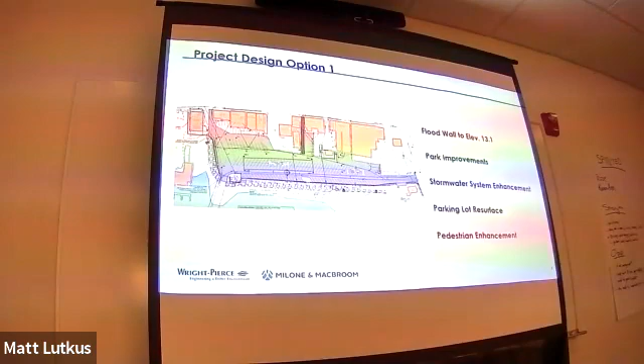We also looked at resurfacing the parking lot and pedestrian enhancements. Another stormwater enhancement we looked at: what happens if you have a rainfall event in the parking lot and you only have so much volume in your stormwater system to store that water.

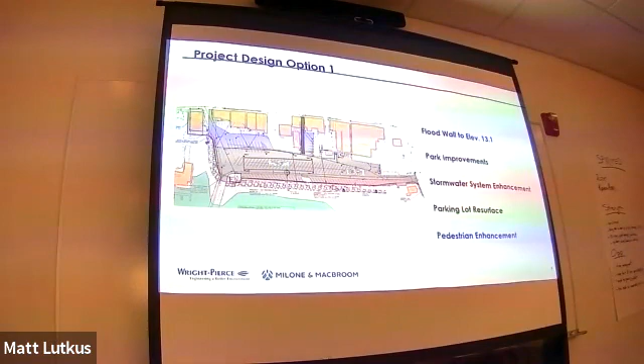So we looked at how to prevent the parking lot from flooding internally during an external flood condition. We looked at a host of different scenarios to come up with the 100-year, or 1% return interval, for that scenario, running probability models to see how big our storage would have to be to avoid flooding any buildings internally during a river flooding event.

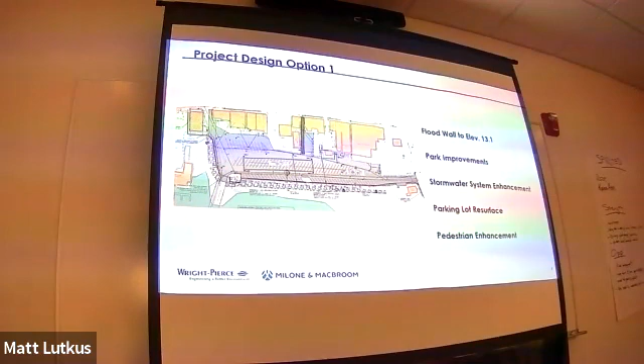Our design option two, focusing on the west side where the major change happens, has all the same components as option one, but the wall height is again 11 feet, not 13.1. On the west side, we looked at some temporary deployable walls or flood barrier systems you could deploy in that area to protect up to 11 feet of height.

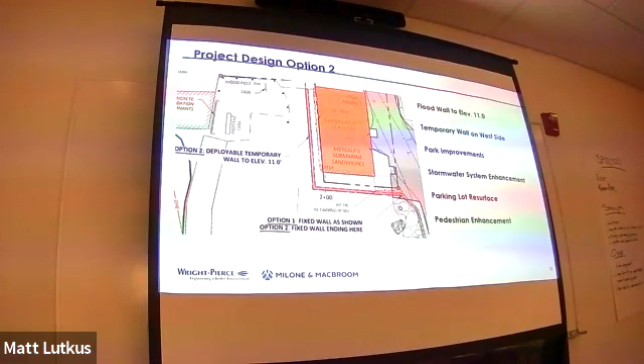We have some options there we'll discuss later as a stopgap measure. The wall itself would be designed so that in the future you could raise it to a higher elevation of 13.1 feet. We also looked at a 100-year sea level rise scenario that took us to over 14 feet high.

We looked at several different wall options. When we started this project, our initial thought was to put up a sheet pile wall we could clad. When we ran those numbers initially, they came in quite a bit higher than our budget.

So we went back and looked at other alternatives for a wall that would be less expensive and within our budget. We worked with Milone and MacBroom's geotechnical engineer, Eric Teal, who I believe is also on the line in case we have questions for him. He's in the Zoom meeting.

We looked at a number of different foundation and wall systems. Eric worked with a contractor who provided information, including cost information, on a rapid impact compaction process, where you compact the surface to densify the fill layer sitting on top of the clays, slowing the permeability so that tidal surges don't significantly impact the structural characteristics of the parking lot and the wall.

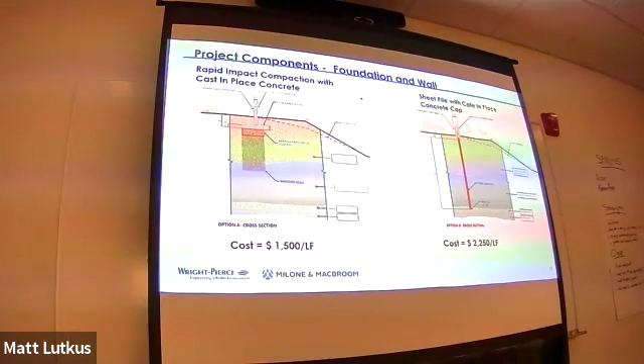The sheet pile wall, as you can imagine, is a natural barrier, and that's one of the concerns from a geotechnical perspective. If we need a wall that meets CLOMR or LOMR standards in the future, you can't have a lot of groundwater movement during high tide events, which currently seems to occur in that fill layer above the clay and below the parking lot.

So what we did is we costed out these options, and it looked like the rapid impact compaction foundation method with a cast-in-place concrete wall on top appeared to be significantly cheaper per linear foot than the sheet pile wall system with a cast concrete wall on top.

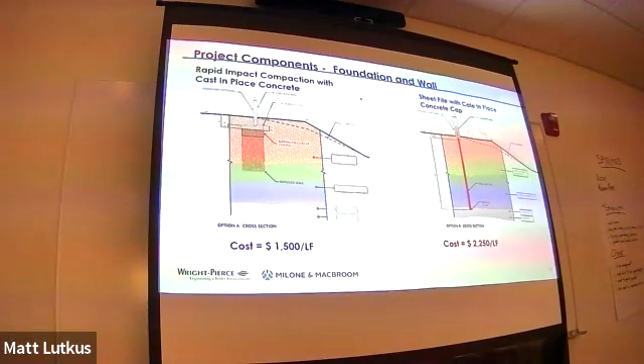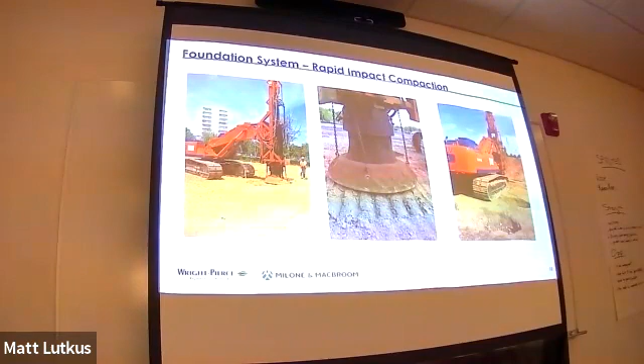I'll go into a little bit about what the foundation system is. These are some photos of the equipment and procedures used. This equipment is usually operated by specialty contractors who come in and densify the soil underneath the wall using impacts on a large plate. They create these holes or depressions between locations as they do this, which densifies the soil enough to, number one, support the wall, and number two, slow down the groundwater movement through that area.

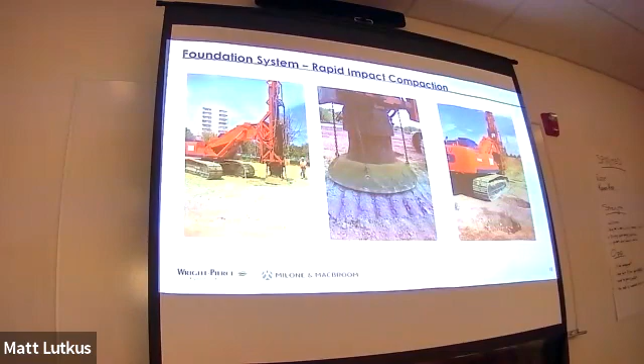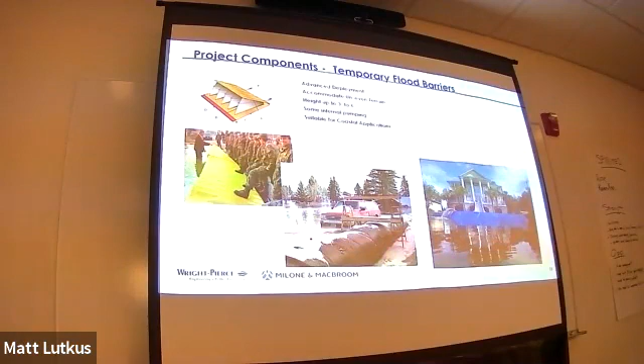In that they tend to come up and stay there for a while, several days. Same thing with the porta dams - those are used for longer term solutions. The deployable dams, in looking at the research, it's hard to say if they're used any longer term, but they are used in tidal situations. They're very easily deployable, so thinking about it, it would probably be a good fit for this location because it doesn't take a lot of time to deploy, and again, your flooding situation is a very temporary one.

And we know when it's going to happen. Right.

So what I'll do next is get into some of the different components within the parking lot. As I mentioned before...

On the inflatables, what's their lifespan, and would they be deteriorating over time while in storage and not being used? I'm sure they have a life - I didn't check what the lifespan was, but from reading the literature, they're used several times, not one use and throw away. They're used over and over again, but I couldn't comment on their actual lifespan.

And how are they subject to - I'm sure they're very thick-skinned, but I'm concerned about punctures. Yeah, they are fairly thick-skinned, and all of these systems can be deployed over uneven terrain. So if you have curbs or small undulations in the ground, these things will mold to the ground itself.

Well, I'm definitely curious about their longevity. Yeah, that's certainly something we can investigate further and see. Thank you.

Getting into the other components of the overall project left to design, the stormwater management system - we have new catch basins and piping to put into the parking lot. One of the things we discovered with the sewer project is that the existing catch basin system, storm drain system, is in very poor condition, so it's certainly appropriate to look at replacing it.

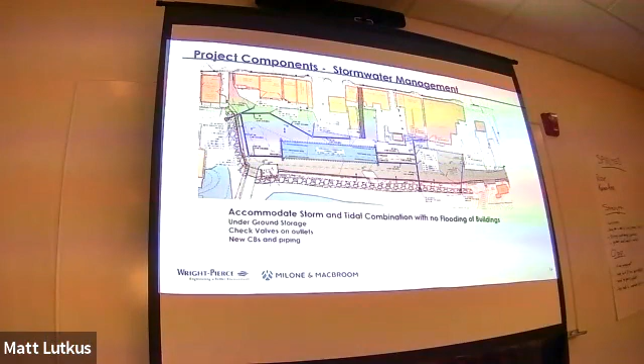We're looking at Tideflex valves on the outlets as they go into the river, so the river water won't back up into the system and flood the site from the interior. In terms of accommodating rainfall events during tidal flooding events, we need to put in underground storage below the parking lot so that during a tidal flooding event, if you have rainwater, it gets collected by the storm drain system, it gets diverted into the underground storage system, and when your tide drops far enough, the water starts to drain out of that system.

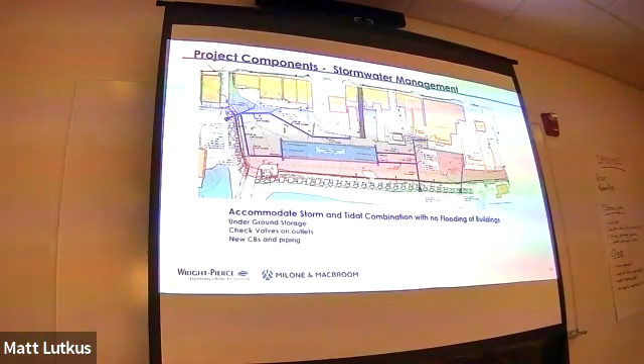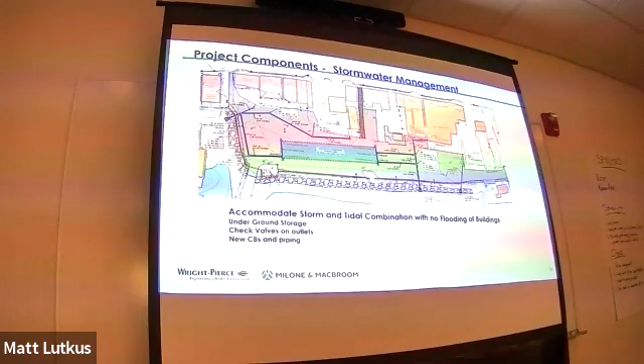What we looked at there - I've got some examples. We were looking at an R-Tank, which is basically plastic crates that are assembled. They have plastic structures inside of them, but they're 95 to 98% open space. Most other systems might involve chambers with a lot of rock around them, and rock only has about 40% porosity. So these systems offer a compact footprint, which is essential since we don't have a lot of space.

We have a big parking lot, but there's a lot of other utilities in here, so we have to fit this storage in and around. We looked at that as a potential solution for underground stormwater storage. The system we're looking at is about 38 by 228 feet and not quite 3 feet tall, so there'll have to be a large excavation, this system put in place, and then the parking lot reconstructed over that portion of the storage area.

I got a question. So on a system of that size that you came up with, designed to handle the runoff of water during a storm, how did you arrive at that number?

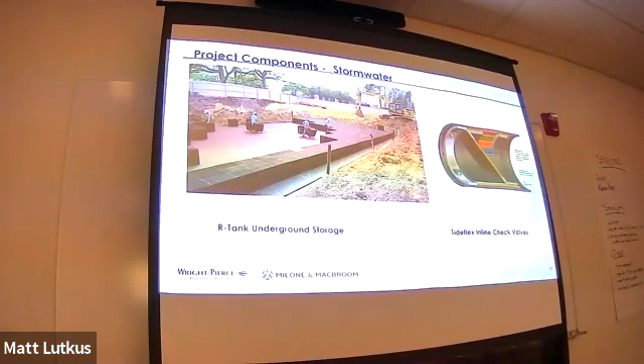On the right, I've got what the Tideflex inline check valves look like. They're basically a rubber insert into the outlet pipe, with a membrane in there that opens when the hydraulic pressure on the inside is higher than the hydraulic pressure on the outside. So it allows water to escape in that condition, and it closes once the water on the outside is at a higher elevation than the water on the inside.

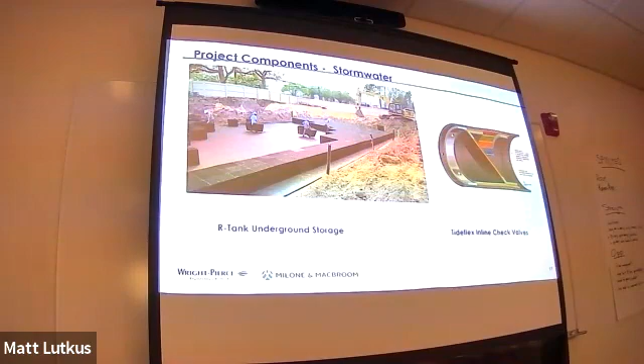We also looked at some pedestrian improvements. One is putting pavers in Taco Alley and painting a portion of the walkway down along the parking area. We also looked at extending the sidewalk from the parking lot up to Water Street, about a 200-foot long sidewalk in that area.

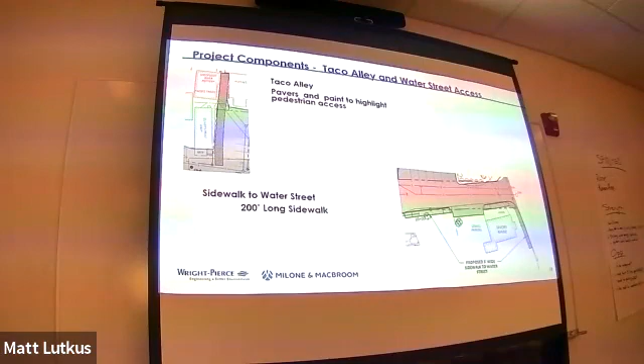The parking lot itself - you may look at the slide and say that looks like an odd shape. What we tried to do in all of our improvements is focus on what the town has control of. So we looked at the town property here, which is the parking lot, but it doesn't go up to the backs of some of the buildings. So from EDA's funding perspective, we need to demonstrate that we have the right title and interest to do the improvements we say we're going to do.

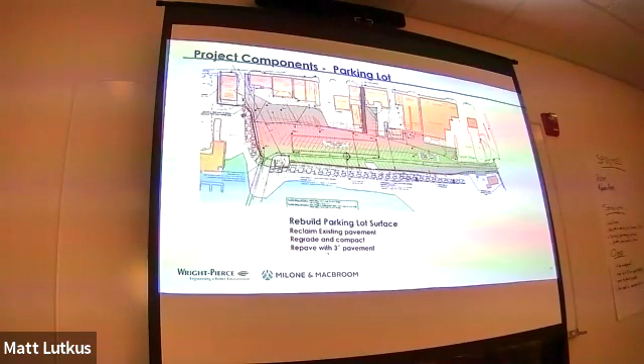So what we are proposing to do is reclaim the parking lot and repave it with 3 inches of new pavement. So we'd be reclaiming it, regrading it, and repaving it. Now there's going to be a large hole in the middle where the storage tank is. That area won't have any reclaim on top of it, unless we reclaim it first, move that material, then do the excavation and put the gravels on top again.

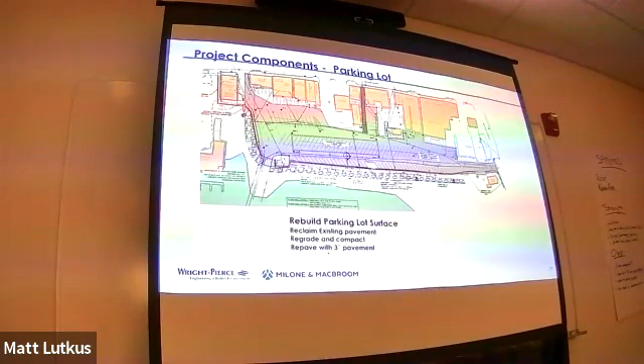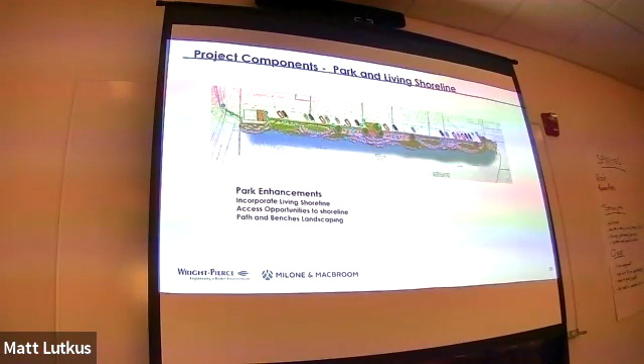The park improvements and living shoreline - this part of the project we carried in all of our estimates as well, where we looked at making improvements to the shoreline itself by redoing some of the riprap, introducing some areas where we could do plantings to create this living shoreline, and then have a fairly basic park on the surface. You'll see that a little bit later. In our cost estimates, you may have noticed that we've done some basic park improvements, and then as alternates, we have a number of different options you could select from if funds are available.

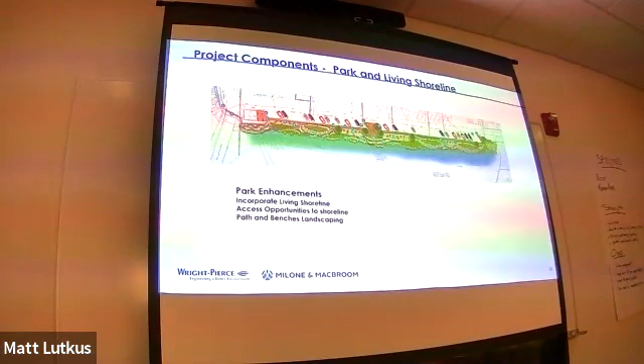As we mentioned, our available funds are 2.639 million. Option 1, the cost for that option, is $2.9 million. And for option 2, it's $2.487 million. So option 2 is still below what we have for available funds. Option 1 is going to be above it. I wanted to at least present that to you, so you're aware of what those two different things represent.

There may be other things you want to take a look at, but the other things I just mentioned are alternatives. We did break out a number of different alternatives.